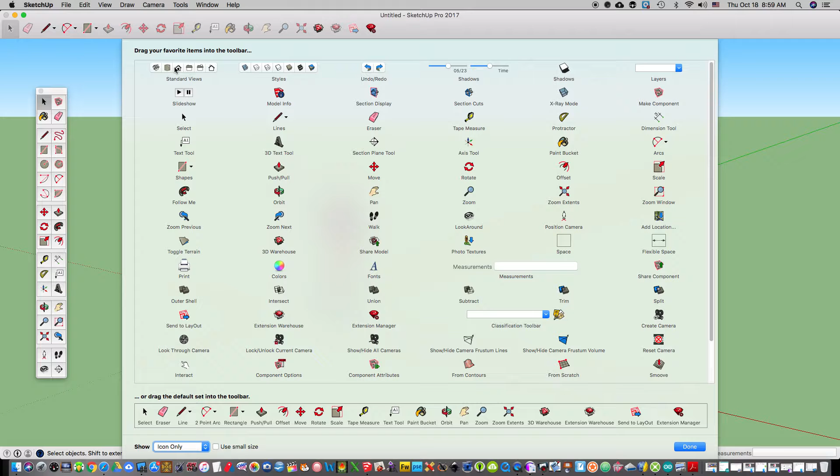So I would like you to start by doing the following. When you open SketchUp, choose View, Tool Palette, and Large Tool Set. If that's not turned on, it will open up this tool palette for you. I would also like you to go to View, customize your toolbar, and drag the standard views up onto your toolbar. They will be very useful.

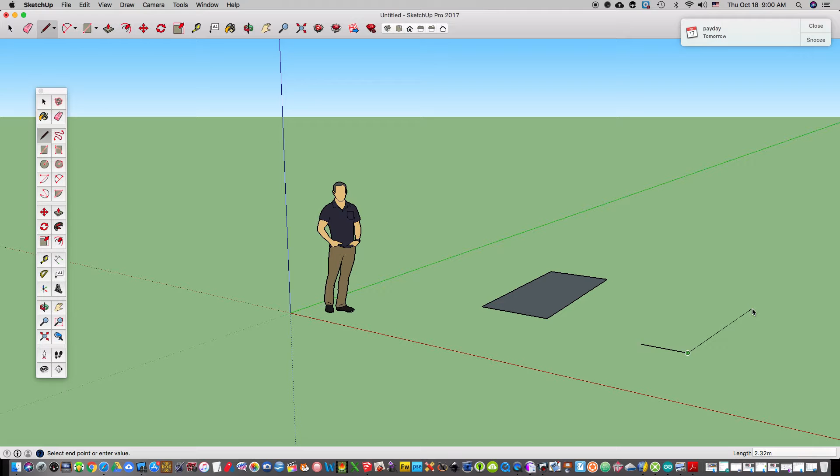So now to begin, what I'm going to do is draw a shape to represent the palm of my hand, and I'm going to keep this, as I said, quite simple. There's the palm of my hand. If you want to make a somewhat more complex shape, you can. For example, we can take the line tool and draw whatever shape you see fit to represent the palm of your hand.

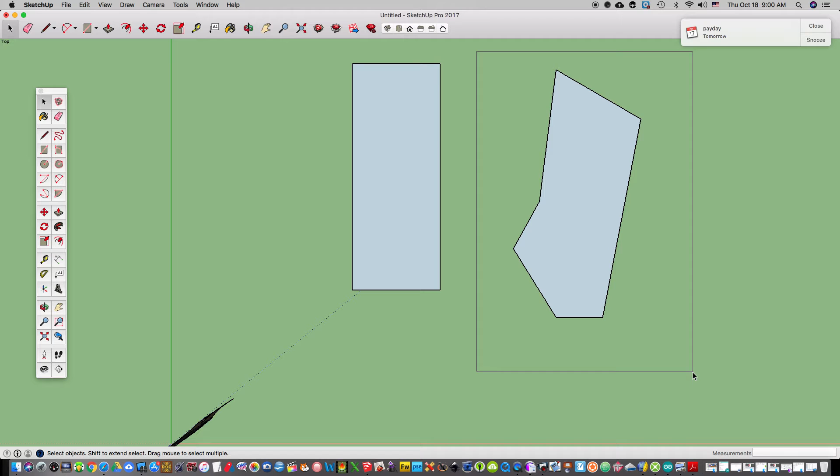The next step is going to be the same either way. I'm going to look at this from a top view, and there is my two shapes. I can see that I drew my palm a little bit distorted, but I'm going to delete this one and focus on my square hand.

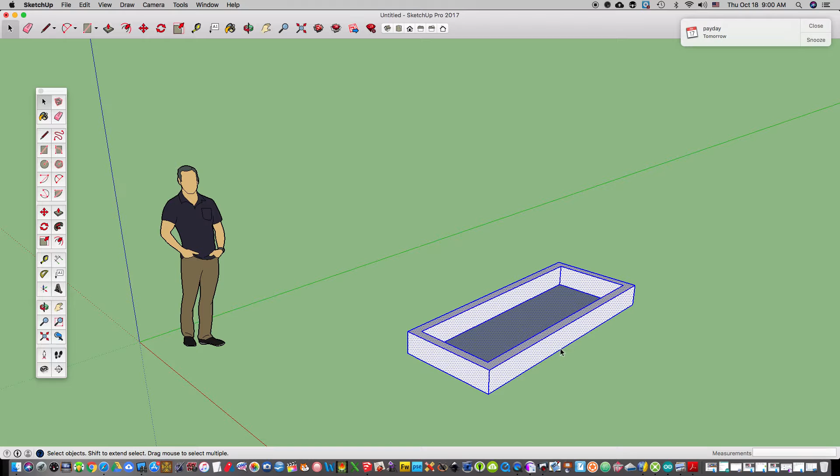So what I'm going to do here first is choose the offset tool, offset my hand, and then I'm going to push-pull it. I'm going to go back to my isometric view, push-pull it into 3 dimensions. Now at any point in time I can scale my object by selecting it, choosing scale. So I'm going to square it up just a little bit. So there's what we have for the palm of my hand.

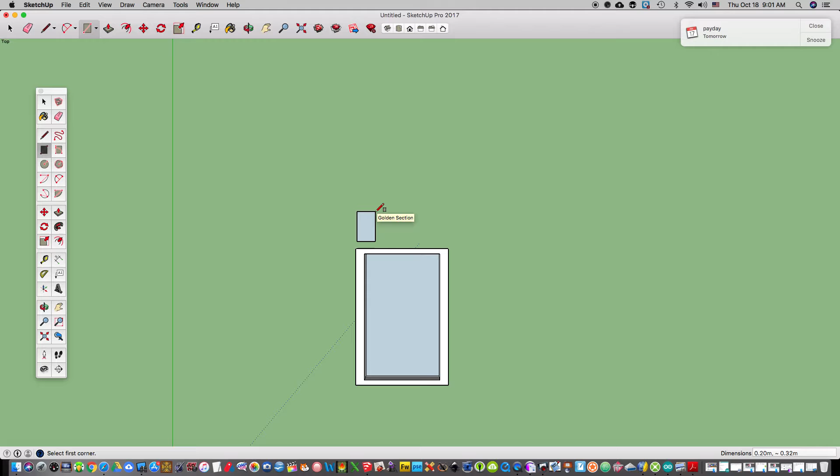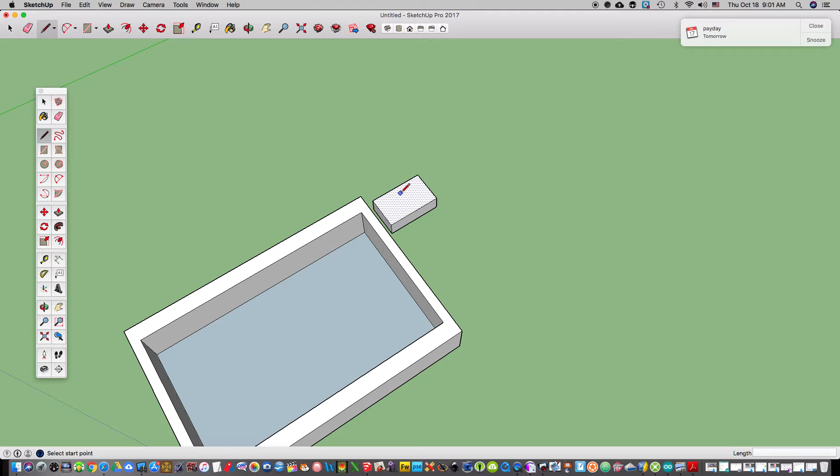So I'm going to give that some height by using my push-pull tool, take my pencil tool, zoom in either with the wheel on your mouse, or you can zoom in with the zoom tool. Again, take my pencil, and you'll notice when I move my pencil around the edge, it snaps to various features, midpoints, endpoints, edges. I'm going to draw a line from midpoint to midpoint.

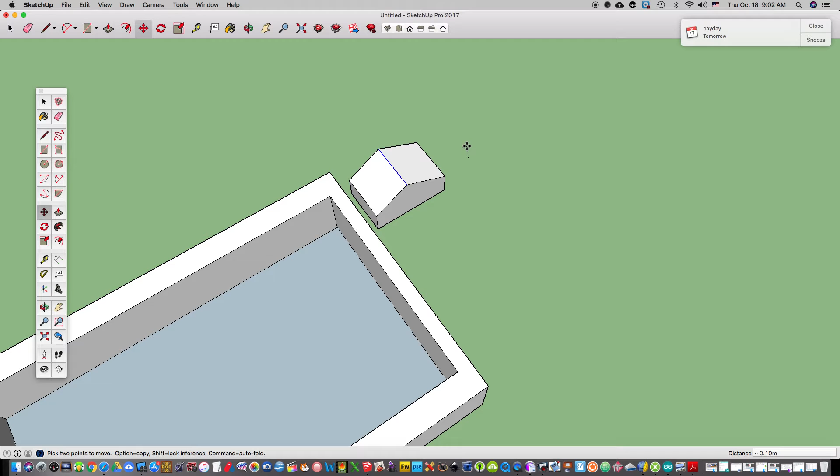I'm going to select that line, and I'm going to lift it straight up. And if I spin that around, you'll see what my finger is going to look like. Now I want my finger to be approximately the same height as my palm, so I'm just going to move it down a little bit.

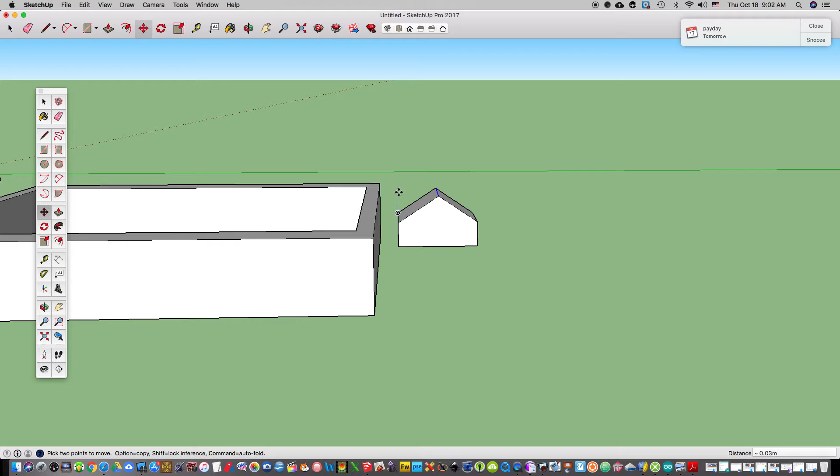And the reason we have these angles on here is because when you bend your finger, if this was a square, the square components would bump into each other.

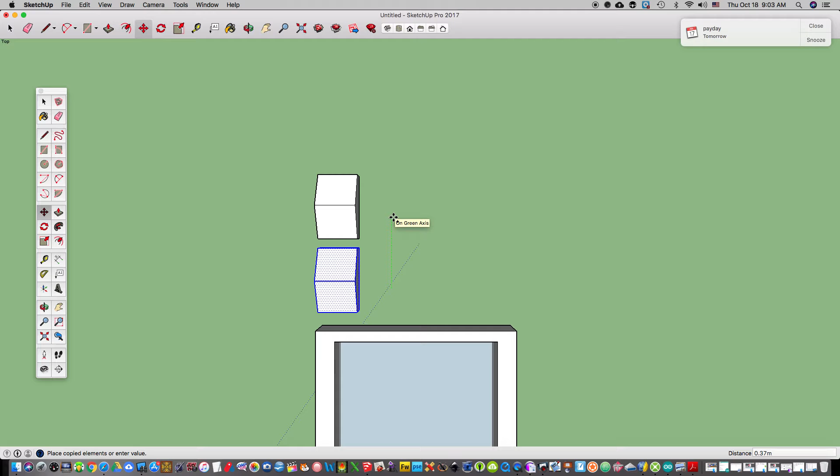So back to my top view, pan over. I'm going to select that component of the finger, and I'm going to move it. But before I move it, I'm going to hold down the Option key. Notice I'm moving it directly up the green axis, and I can do that again.

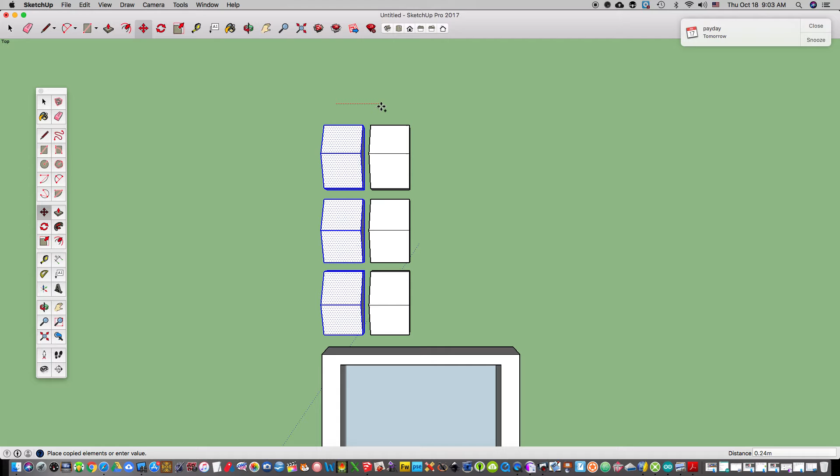So there we have the 3 parts of a finger. Now again, from my top view, I'm going to select all of those, and I'm going to do the same thing, move, holding down my Option key. And there I have all the pieces of my hand. Center those, and I'll spin that around. And there we have a hand and some finger pieces.

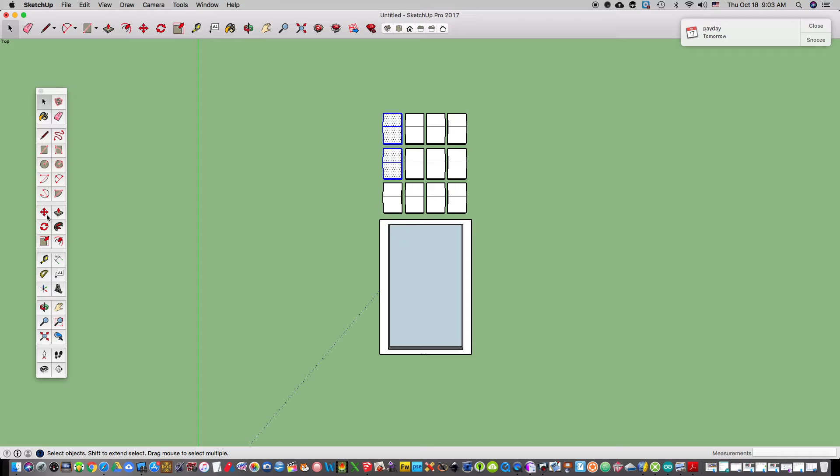Okay, back to my top view. I'm going to take 2 of these. I'm going to do the same thing, move, but this time again, hold down my Option key. And now I'm going to rotate these same pieces.

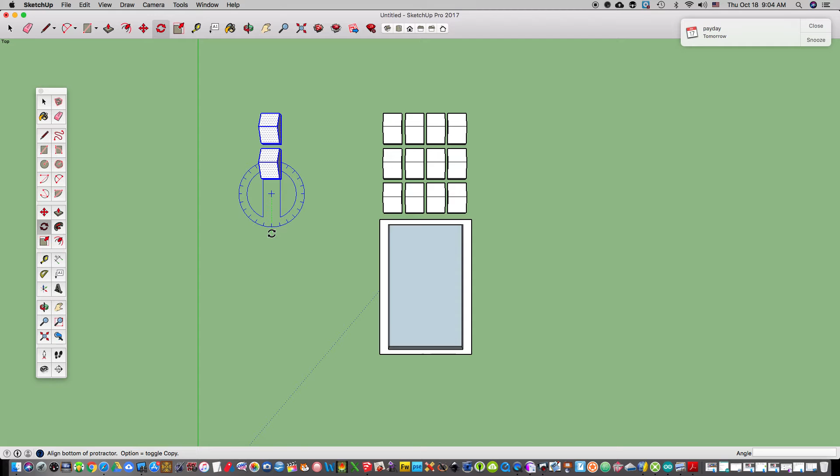Now, there essentially is my hand. Fingers, palm, thumb pieces, and notice there's only 2 components of our thumb rather than 3. Now, for printing purposes, I don't need this sticking out to the side because these are all going to be separate pieces when we're done printing anyway.

So I'm going to just hit Apple Z and undo my rotate. Now, I rotated it to show you how it is done, but I'm just going to move these in beside right here. That way, when I try to print this model, it will print in one square unit rather than taking up extra space on the printer. That may allow us to print multiple copies at a time.

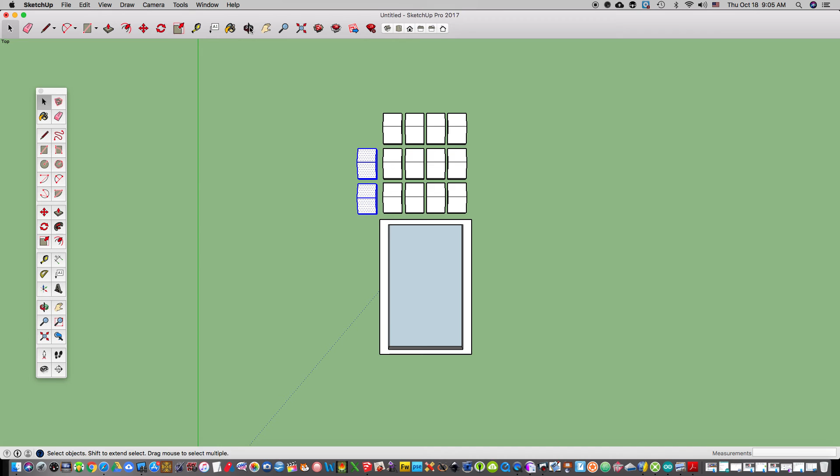All right, so we're not done yet. There are a couple more things I do need to do, and that is to cut holes through these component pieces because I need strings running through these to help pull and flex my pieces. So what I'm going to do again is take the hand, 3 clicks, and I can see now that when I have this created, I do need to stretch it back a little bit wider to accommodate all of my finger pieces. Back to my top view,

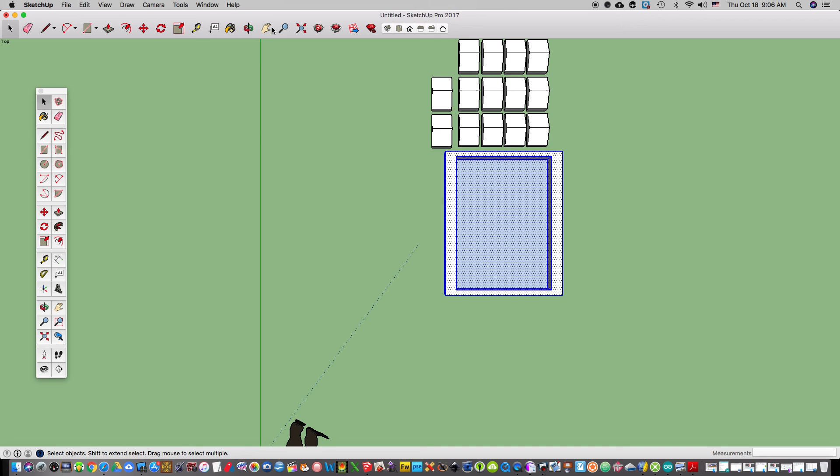and I'm going to move it just a little bit. So what I have done here is lined it up so I can drill a hole all the way through, straight through the hand and straight through the fingers. And I'm going to do that 4 times so that I have the holes appropriately set for pulling the cable to flex my fingers. So in order to do that, I'm going to draw a little square over here.

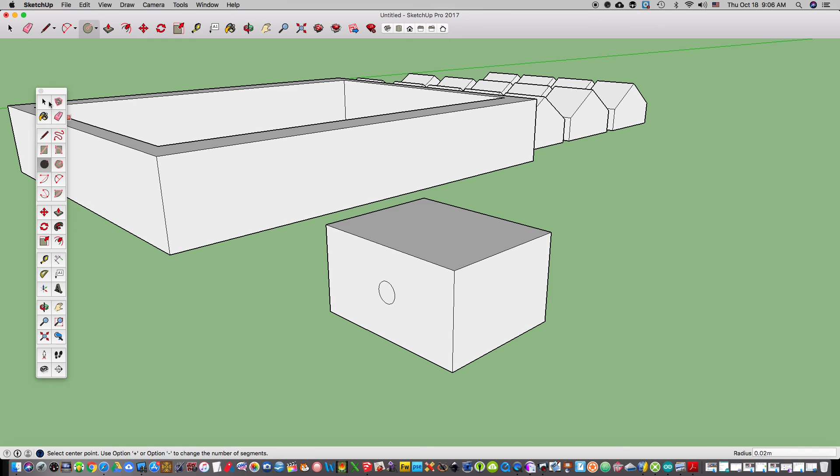I'm going to go to my isometric view, and I'm going to give this some depth. And I'm going to draw a little circle right on this face here. And this circle is going to represent the size of the hole I want to cut out of my object. Now, your hole doesn't need to be very big because we're simply running a thread or a small piece of string through it. So I'm going to leave that piece, and I'm going to push-pull it so that it is longer than